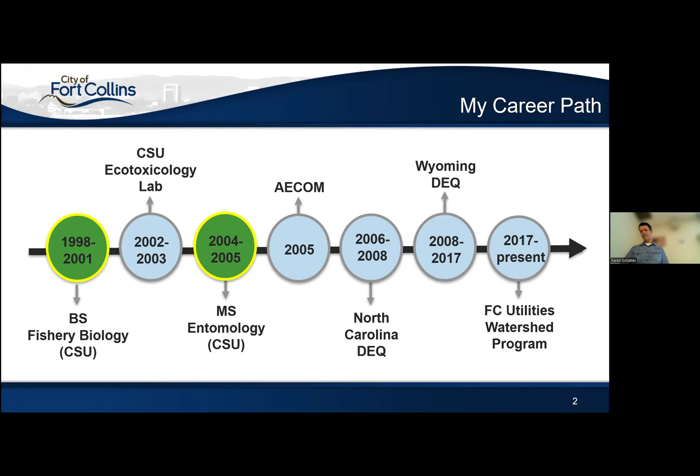So a source watershed is essentially just a watershed that provides raw water for water treatment. And our program's mission is to monitor and protect the city's source water supplies and the overall health of the Cache la Poudre River watershed.

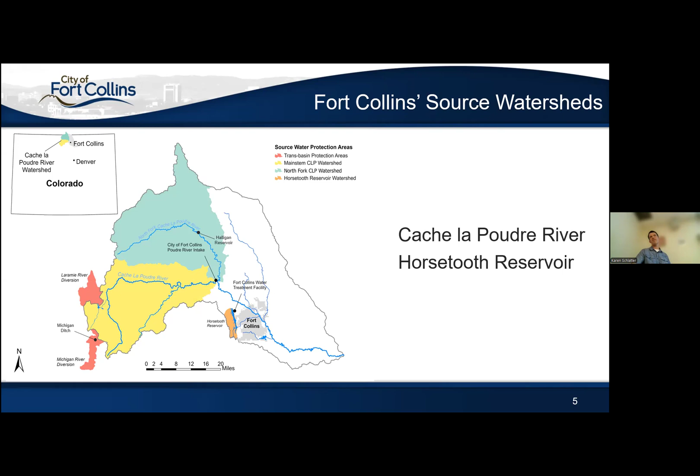EPA describes green infrastructure as landscape features that filter and absorb stormwater where it falls, and managing green infrastructure is a common strategy in the context of stormwater management in urban environments. I bring this up because the watershed program takes a similar approach, whereby we look to protect our source water supplies by protecting the broader watershed that water is actually coming out of. So we protect green infrastructure as well.

There are multiple pollution threats—just about anything you can imagine can end up in the river in our water supply, so we're always having to roll with the punches to try to mitigate those threats, and I'll get into that more as I move through this presentation. The scale and complexity of the projects and programs to mitigate those threats is also quite complicated. We, like everybody else, face funding and staff capacity limitations, and all this and a lot more is set against the backdrop of an ever-changing climate.

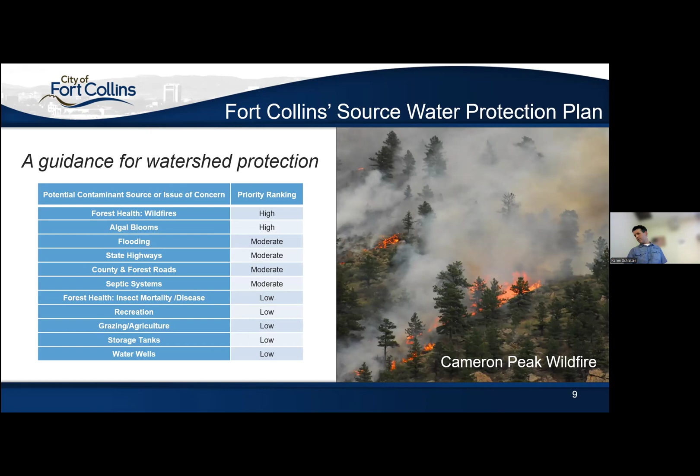So nearly a decade after its initial development, our Poudre source water protection plan is due for an update. And rather than develop another Fort Collins focused plan, our watershed program decided to instead opt to collaborate with other regional water providers that share our source watersheds.

It'll also increase alignment between the 5 water providers in terms of what the predominant threats are, how we should prioritize them, and then best practices that are best suited to mitigate those risks. This plan will link to current and future projects and programs—we've been collaborating with these folks for a long time on other projects—and so it'll make this plan highly implementable.

We'll have a range of different metrics in there to further evaluate the effectiveness of collaborating together on this plan rather than going it alone. And then lastly, this approach will ultimately just lead to more cost share collaboration between the 5 water providers.

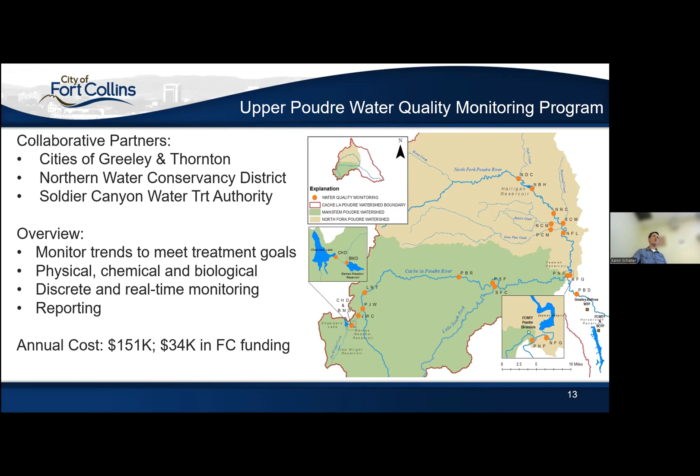The data are reported out in a tiered series of reports, ranging from seasonal updates each year in spring, summer, and fall meant to provide a snapshot of watershed conditions accessible to anybody in the public. The next tier up is annual reports, where we look at short-term trends from the previous year's data. And the highest level of reporting is long-term trends, where we look at the previous 5 years of data compared to our baseline.

So in summary, monitoring and protecting the city's source water supplies is very important for us to continue to provide reliable, high quality water to our customers. We use a collaborative approach to protect our source watersheds, and this is really the key to our work and our success. I shared just a handful of plans, projects, and one program with you today, but this is just the tip of the iceberg for what we have our hands in.

We collaborate a lot, and it highlighted nearly 20 collaborative partners and about a 2-to-1 return on investment for our customers. So it's a big deal. This process is working for us, and this approach has allowed us to better leverage our resources and improve the scope, scale, and reach of the work we can do. And lastly, this approach has led to better overall watershed stewardship and watershed health.

I've been asked to provide a little career advice to wrap up my presentation. The first thing I'd suggest, and this took me 15 years of my career to figure out, take this with a grain of salt, but I think it's really important to do some soul searching, to think about what makes you tick, what makes you happy, what you're passionate about, and what you want to do when you come to work every day. I'd recommend continuing to look for that until you find it. And when you do, you'll know, because you'll have fun going to work every day. I get fired up when I go to work. It's really fun. Fits me really well.

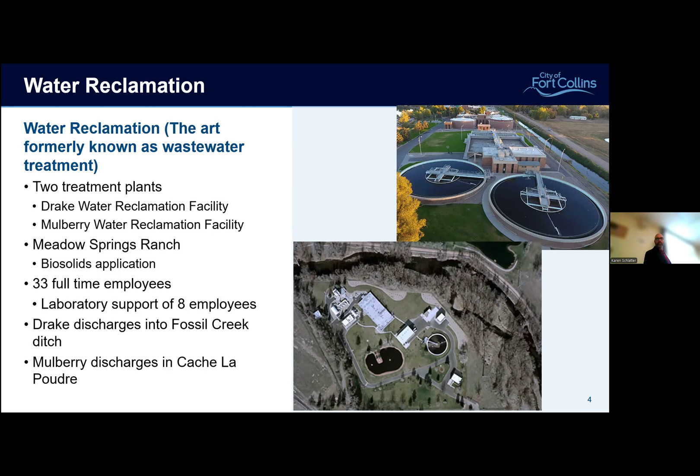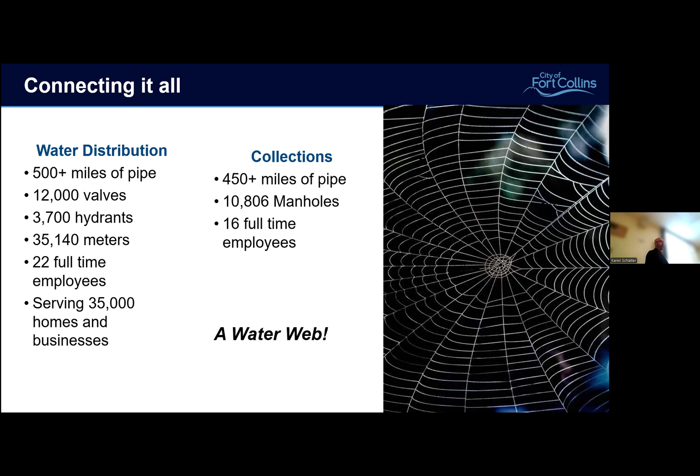Our water and wastewater systems are a little odd because our wastewater and water service areas are different from the city limits of Fort Collins. So there is oftentimes confusion when we get water complaints from people outside that are in the city limits of Fort Collins, but not in our service area.

I had to look this one up because I didn't know, but does anybody know the difference between a retention and a detention pond? I'll tell you, but I've got to read it first because I already forgot. Retention ponds hold water permanently, and detention ponds allow for a slow release.

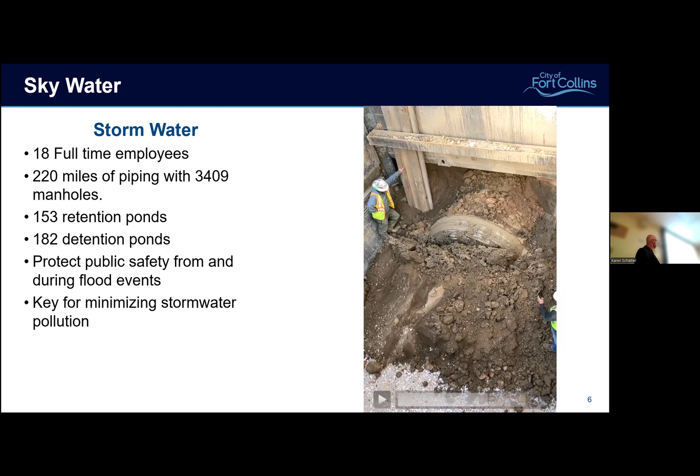Water treatment and water production are all about protecting human health. This is kind of a diagram of how it's done. I always like to refer to it as basically mechanical and chemical, and then some hydraulic means of treating water. We add a chemical to help flocculate and grab those particles so that they can settle out, and we remove the solids. Then the clean water flows into disinfection and some additional chemical treatment with fluoride, carbon dioxide. That's how the water treatment process works.

It's a lot more complicated than I just described to you, but jobs in water treatment include laboratory support, operators, mechanics, and then managers at various different levels. We also have process specialists, so there's a number of different jobs in water treatment.

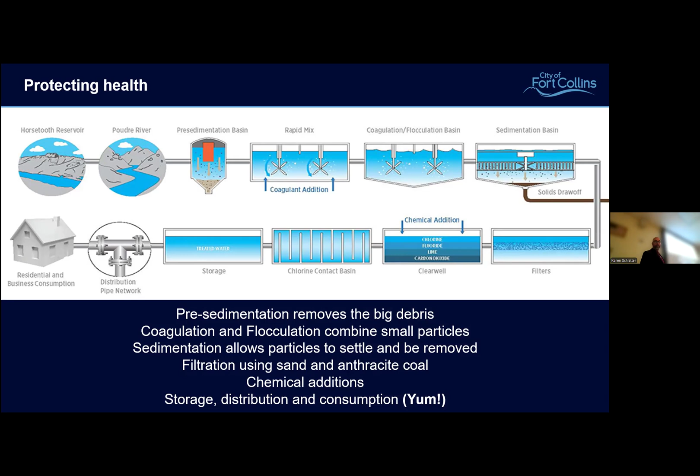And then we go into the distribution system. The distribution system is a lot of miles of pipe. Our crews are on call 24 hours a day to respond for repairs. Those repairs are regulated, and so our field operators are required to be certified as Colorado water professionals in both collections and distribution. And I failed to mention, our water treatment plant operators are also required to be certified water professionals for water treatment, and they are required to be certified at the highest levels because all of our systems are classified at that highest level.

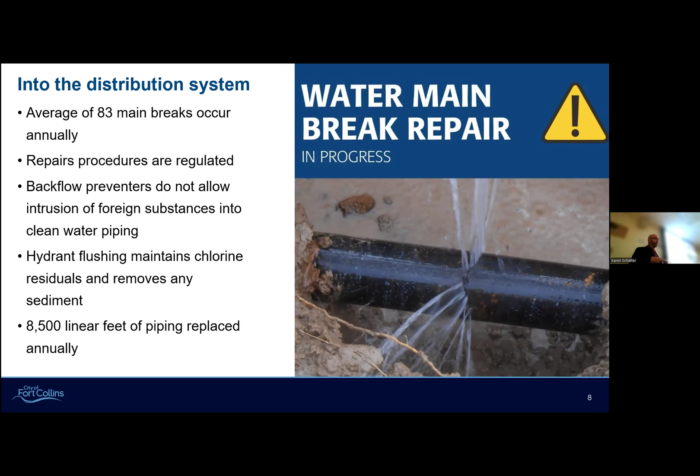So into the collection system—this is my field operations manager, Andrew Gingrich. He is awesome. If you ever see him, just walk up to him and say hi, and he will chat your ear off, no doubt.

So into the collection system: water goes into people's houses and then it comes out way, way grosser, and that's the collection system we have. This is a little different from the distribution system in that it's not pressurized, it's just a flow through pipes. That allows us to do a little bit of extra work to inspect those pipes. We'll run ROVs up in there to inspect the pipes, see the condition, and make repairs and clean outs as needed. We have an average of 9 blockages that are cleared annually, and that is primarily due to flushable wipes that combine with fats, oils, and greases and make a big gross mess.

Remember the 3 Ps: pee, poo, paper. And then Andrew's daughter came up with another P, puke. So college students should know that well, right?

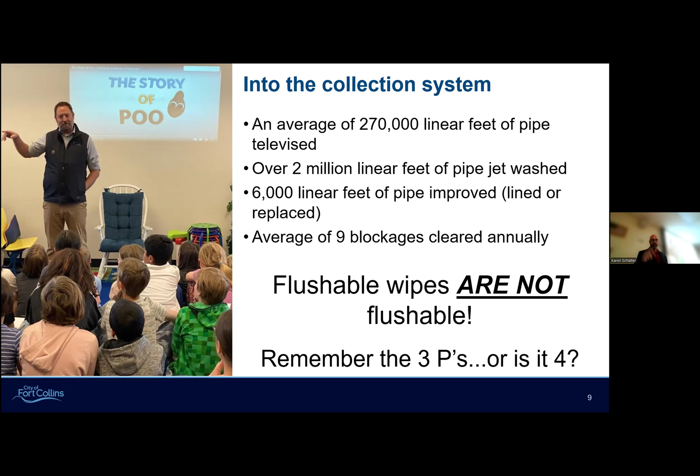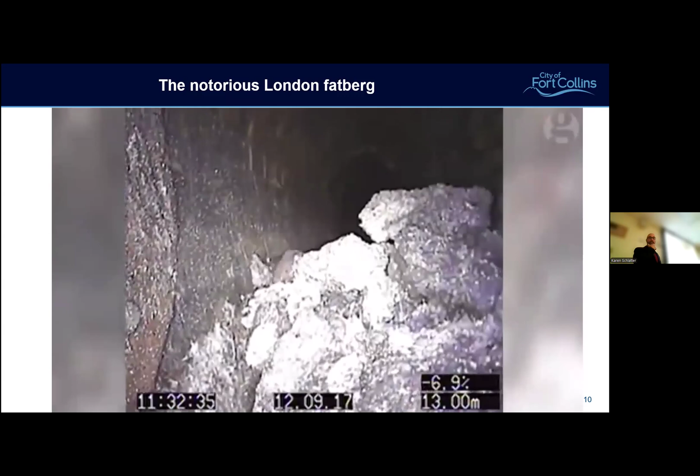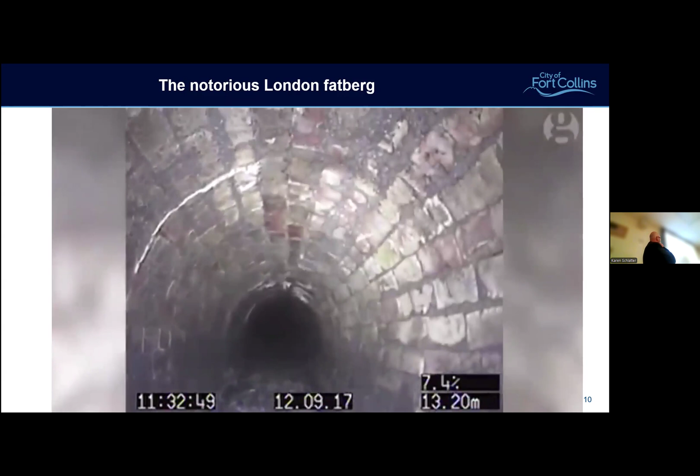Moving on, I just have this short video. This is a notorious London fatberg, which is what those congealed wipes wind up being. It is 130 tons, 820 feet long, and it took them 3 weeks to clear. It costs over $1 million a month to clear blockages in London. This one was so, I don't know quite how to describe it, but I'll say cool. The London Museum wanted a piece of it, and there is a piece of it in the London Museum.

Okay, so the Drake Water Reclamation Facility—wastewater treatment is more complicated than water treatment. There's a lot more involved, a lot more energy required, and there's a biological component to wastewater treatment that is absolutely critical to have. Water treatment does not have that biological component.

Here you have the biology happening right here, and it's sad that it's drawn smaller because it's the biggest part of what the wastewater treatment plant does. The anaerobic basin removes phosphorus, the anoxic basin removes nitrogen, and the oxygenation basin is intended to remove carbon, or what we call BOD, biochemical oxygen demand.

To be a water or wastewater operator doesn't require you to have an education to be in the field, but it really helps, because understanding math, chemistry, and biology really helps you run the process and pass the tests. And the tests are difficult.

Oh man, I had it on the other slide. So the biochemical oxygen demand is an extremely sophisticated test—being a lot sarcastic there. It was developed in 1907 by the UK Royal Commission on Sewage Disposal. They determined at the time that 30 milligrams per liter was safe, which is still what we use today.

The reason it's a 5-day incubation time to do the test is because that's the time it took for waste from the city of London to reach the ocean via the Thames River. So like I say, extremely sophisticated, not at all totally out of date. But there are other processes now, like total organic carbon and chemical oxygen demand, that are much more quick and effective.

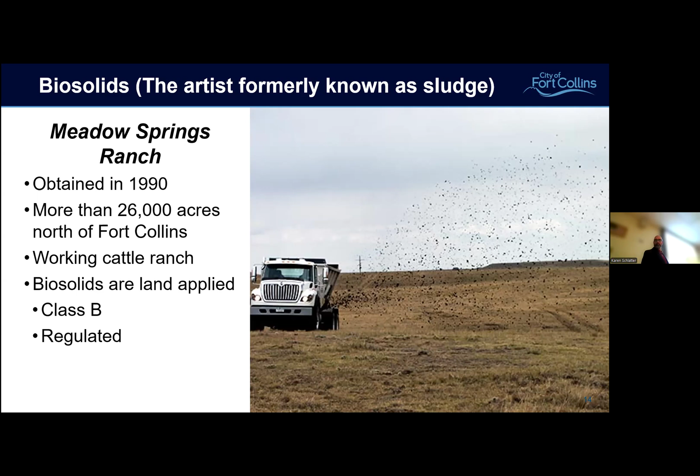So the biggest thing we have for concern right now with biosolids is PFAS, per and polyfluoroalkyl substances. PFAS is ubiquitous in the environment. It's been produced by industry since the 50s or earlier. Wastewater plants do not generate PFAS. Important to remember.

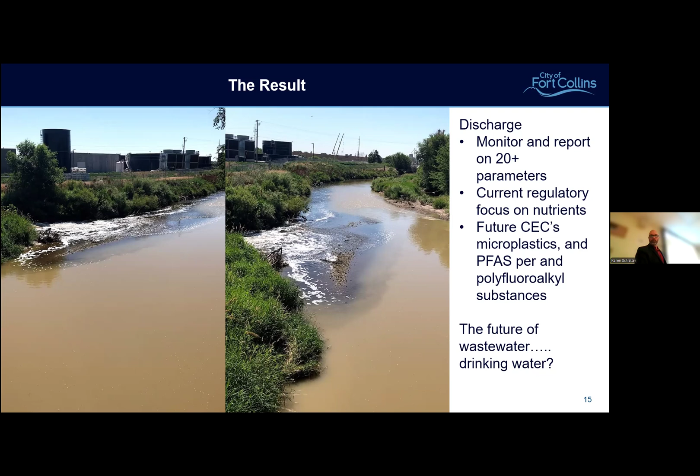So despite that water already being cleaner than what's in the river, some of the biggest challenges we face are new proposed nutrient and temperature limits that will require advanced treatment and major capital investment. Those proposed limits are so low that drinking water plants don't have to meet that level of reduction.

So the solution we feel like is that eventually we're going to connect the discharge of the wastewater treatment plant to the water treatment supply. There's a lot of efficiency there because it's still just very clean water, but the ick factor in the community can be a little much. So there are some regulations around that requiring a communication plan from the state.

Additionally, like Richard had mentioned, climate change is a huge thing. Workforce, people knowledgeable and wanting to get into the water industry is a limitation for us. And then the money, people don't want tax increases, they don't want rate increases. And so that's problematic. So communications is another job that you can get in the water industry, to tell everybody how important we are.

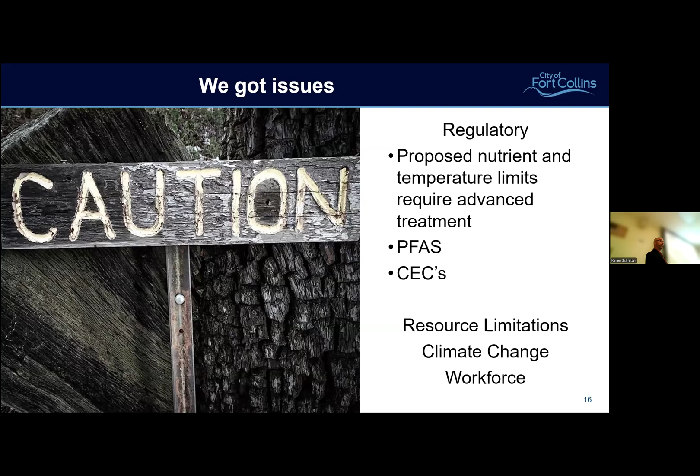So how do you get in? Have a passion for water. Education is really great, but it's not required, especially at the lowest levels. Ask a lot of questions, show that you're interested. Know how to work as part of a team, but I worked nights for 15 years by myself, so I was an individual contributor for most of that time, but I also needed to be able to communicate to my peers what was happening on that shift.

Enjoy working outside, most water jobs are outside. Even for Richard's job, he's out sampling in the watershed frequently. Our lab techs do the same thing. Water and wastewater treatment plants both have buildings that are disconnected. The wastewater treatment plants are oftentimes totally exposed to the elements. And so that's kind of it.

And then I'll just give you one more picture of me. This is my last day at Coors Brewing Company. I was getting ready to do a confined space entry to inspect an equalization tank for an anaerobic process. It was falling apart, by the way.

I have a question. Okay. But in the water, the effluent that's released back into like the Poudre River, for example, are those flows part of someone else's water rights?